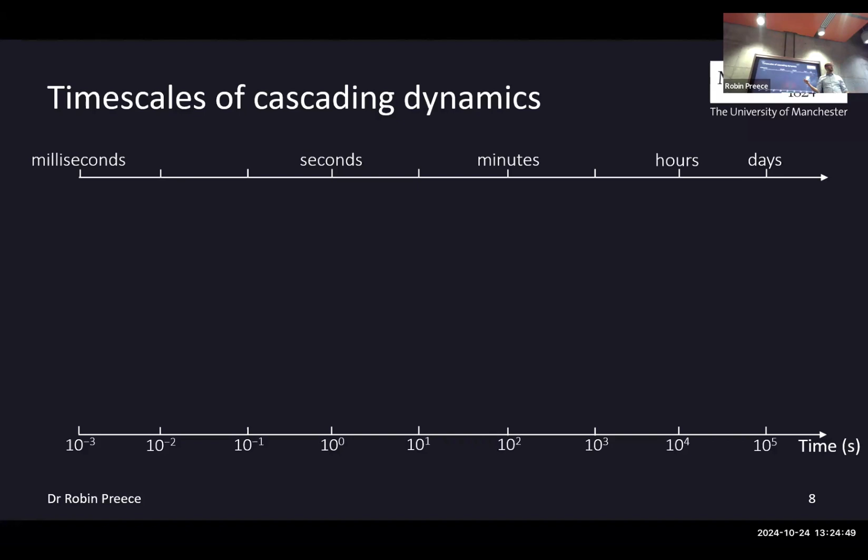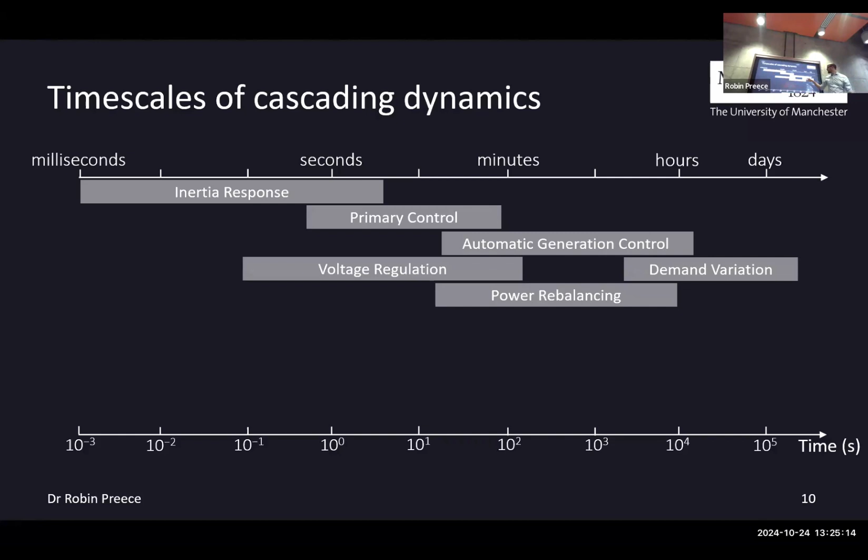So we can start with the kind of traditional frequency stuff, which can span from essentially instantaneous response after a disturbance in the inertia range through primary control into secondary AGC control. So how we reschedule our generators and bring our frequency back. We've then got voltage regulation problems. So stuff with voltage, how that's affected by demand, how power rebalancing within our system is going to affect that stuff.

And then we've also got down here, what are the protective devices that are operating on these different ranges as well? So if there's a faulty element, how long does it take to remove that from the system? If we've got under frequency load shedding or under voltage load shedding, how long does that take to operate? We've got things like branch overload protection. So if a line gets overloaded, at some point we need to trip it out because it's going to melt.

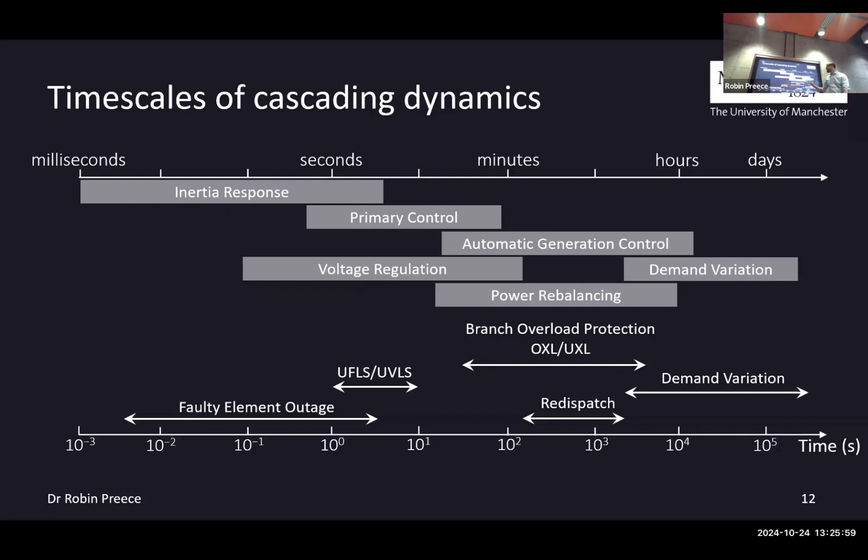We've got overexcitation, underexcitation limits on our generators. We can redispatch those generators. And again, we can choose to redispatch our demand if we have control over it as well. So there's all of these potential options. And I'll tell you now, doing all of it is too much. So we couldn't do all of it. We had to make some choices, especially as a first pass. And so I'll come back to which ones we chose in a bit.

So for us, we were looking at, okay, the other option is static models. And here when I say static, I'm going to start with just an assessment of DC power flow. So these are the super quick ways of assessing the power flow in your system. So a DC model. So great, reliably converge. I say converge, it's not really converging, is it? It's just like a direct solution.

Very computationally fast. You can easily capture things like line overloads. So it's great. DC power flow will tell you the line loading. Obviously it's inaccurate to some extent, but gives you a good estimation of line overloading. I can redispatch generators. I can deal with those kinds of things very easily. And it gives acceptable consistency with historical data.

So there's been a lot of work looking at using DC models for cascading failures and looking at how does that match up with historical work. And it's pretty good. So maybe we don't need to worry about adding in all these dynamics. Some of the problems, obviously this neglects voltage deviations, reactive power flows, things associated with that. You can then fix that using AC power flow. But obviously the big one for me, it neglected all the dynamics associated with it.

And I guess the reason I'm concerned with dynamics, I mentioned there was the under frequency event in the UK, 2019. Now, in that event, parts of the country tripped off. So some parts of the country experienced under frequency load shedding. Other parts of the country did not. So what that means is that in some parts of the country, the frequency dropped too low. And in other parts of the country, the frequency never went low enough to trigger that.

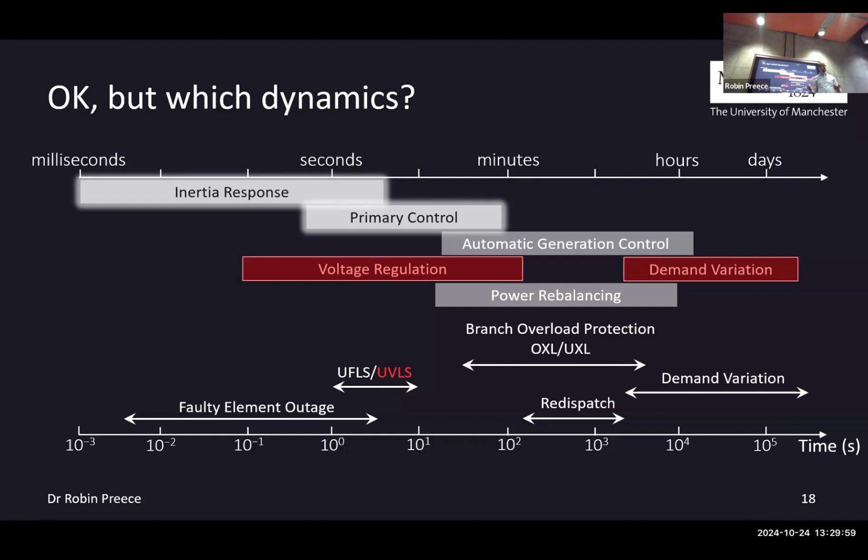So we're going to look at the inertial response, the primary control. We're not too worried about the AGC because it's essentially too slow for us to worry about during these fast cascading events. So we're going to model under frequency load shedding, but we're not going to model any of the under voltage load shedding. And so within our model, we essentially voltage lock it, and we just make it incredibly robust from a voltage perspective, so that we can see all the frequency changes there.

In terms of test systems, we used the Texas A&M ones. You might be aware of these, but they build synthetic models. So these aren't the actual models of Illinois or Texas. They are equivalent models that could exist given the load distribution and generation availability, etc. What's really nice about these is that they're publicly available, and you can get them as dynamic models. So we need to build a dynamic simulator that can then take these and work with them.

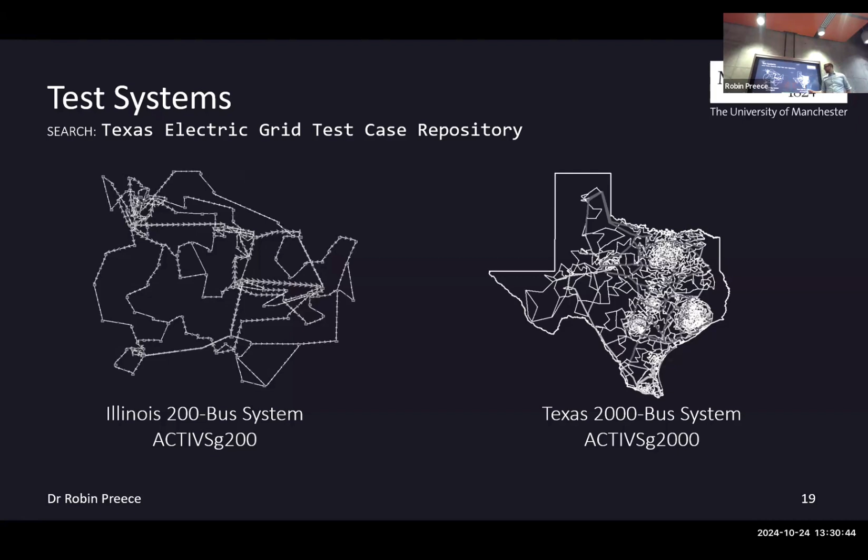And once you get to 2,000 buses as a dynamic system, this is pretty large for dynamic studies. This one takes a long time to run, particularly when we stack in all of these various devices. So our cascading failure simulator, we need an engine for it. We need something that's actually going to churn through and do all these simulations.

And we're using DigSilent. DigSilent is a power system dynamic simulation software package. We use that because we've got a lot of experience using it in Manchester, and we have that experience because National Grid use it in the UK. They use it as their default power system simulator. So we've built up expertise and skills using it to make sure that we can then translate our work into industry and have some industrial impact coming out of it.

We need to model synchronous generators. As I say, we're ignoring the voltage stuff, so we're just modeling these as classical second order models. That means it's got a swing equation. It's got a couple of dynamic states associated with the mechanical system. But from the voltage perspective, it's just a constant voltage output. So we've got no voltage control associated with those, but we do have the primary control. And apparently we've got secondary control.

For demand, demand doesn't matter too much. We are actually modeling it with a ZIP model, but like I said, we're not worried about the voltages in the system, so the actual voltage dependence doesn't really matter. This could just be a constant PQ load; it would be the same result. We have some frequency dependence on the demand, but it's quite small. It doesn't have a big effect on the result.

And then we're going to compare this to a static. We're going to use the DC OPF. So the difference here is that that runs a power flow. And then if it sees that a line is overloaded, it collects up all the overloaded lines, just trips them all off. It will then redispatch the generators according to the new topology.

It allows some variation in some of those generation and loads. It allows them to move a little bit, essentially to emulate the behavior that you would get from some kind of frequency response. And it includes over frequency generation tripping. So essentially, if I have an island where there's too much generation, it will then start disconnecting the generators starting from the smallest one in order to try and find a kind of static operating point that converges.

So we've got some kind of emulation of some of those dynamic processes within this, but it's obviously not running the actual dynamics itself. So those are our two different models. And then to trigger any kind of outage, we're using n-2 contingencies. So these systems are safe for n-1. They're fine, secure for an n-1 situation.

So we need to hit them with an n-2, something more significant in order to cause a problem large enough to start a cascade. And most n-2s don't. Most n-2s are fine. It's only some of them that actually cause problems. That's actually a really interesting question: how do you find out which of the initial contingencies you need to cause a cascade in your system? It's not a trivial question to know where the combinations of multiple outages will be that lead to a big cascade in the system. So we need to figure that out as well.

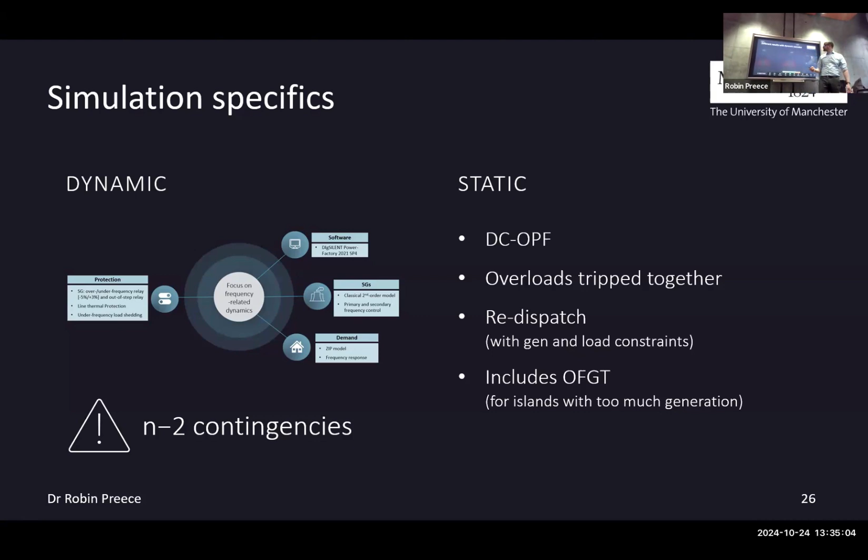So main result, you get different results when you use dynamic cascades. Okay, so we actually see a difference. So here we're going to plot essentially a cumulative probability plot of unserved demand versus the actual amount. So if we see the static one, what this means is that there is a high probability of losing a low amount, and then as you go down the curve, we then see very low probabilities of essentially total blackout in the system.

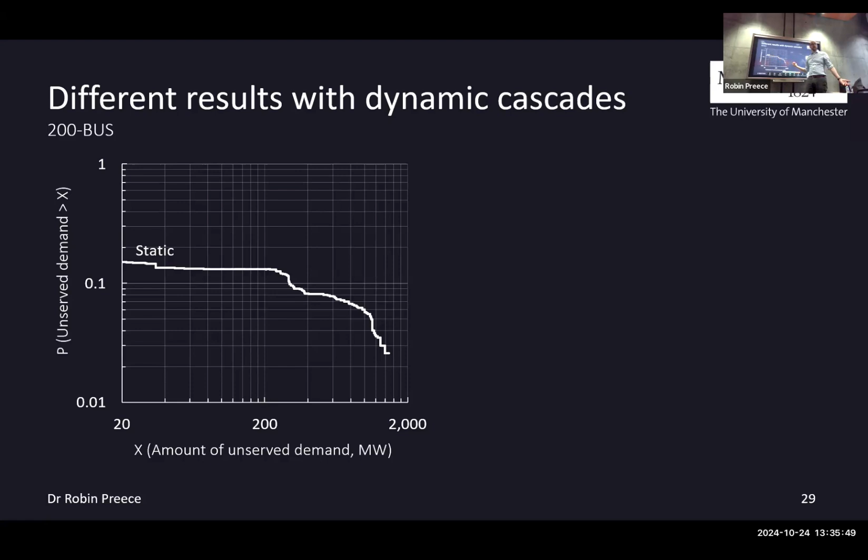So this is the classic way that we plot the results for cascading failures, and this kind of curve is what you would expect. Okay, so this is what you get when you look at this. If we do a dynamic simulation with the same system, but with our extra dynamics in it, we get a slightly different result.

So we have a higher probability of small trips. So we've got a higher probability of seeing small blackouts, like local blackouts, little areas where we've just lost a tiny little bit due to some under frequency load shedding. But we've got a lower probability of larger blackouts. So you can kind of summarize it as these small trips help save the whole system. And so we're seeing this difference in behavior, and this difference maps through into other aspects.

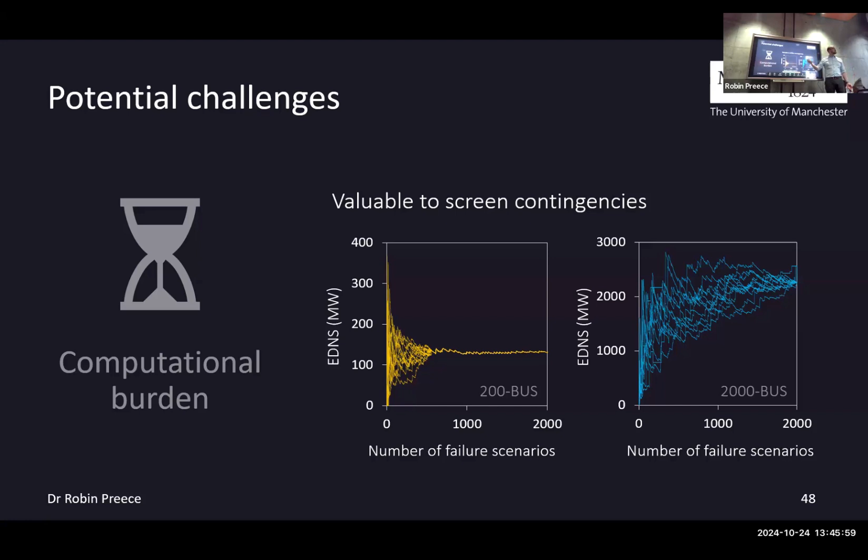So by the time we've run 1,000 simulations of n-2s on the 2,000 bus network, I have confidence that my expectation is somewhere between about 1,200 and 2,400. So it's nowhere near converged to a final answer. And the CVaR values are going to be even worse. So the amount we need to run in order to get this to a reasonable solution, that's a real challenge.

Things we can do to help with that include increasing step size. At the moment, you take a dynamic simulator, and by default, you're probably running at about 10 milliseconds. That's a typical thing that we do for most power system dynamics.

You can obviously push this up. You can't push it too far because at some point you're pushing it to a stage where it's not fast enough to see the devices that you're tripping. So if you've got a fast rate of change in frequency, you can't go much faster than about 0.3 seconds, because you might have crossed over a couple of thresholds for under frequency load shedding within 0.3 seconds. So you need enough resolution in your time step to be able to take an action before the next time

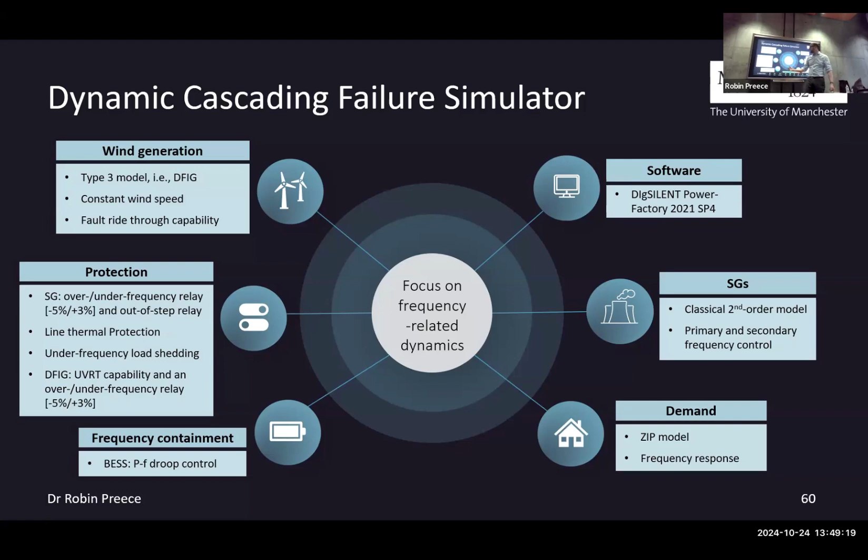We also need to add a little bit more protection. So we need to put protection on for the wind generation. So we've got under voltage ride-through, and then we also have them tripping off for over and under frequency as well. And then we have to add in frequency containment as well. So our system now is potentially going lower and lower inertia. And so we need to add fast frequency containment services to make sure that for a normal secured event, like an N-1, that frequency is not going to lead to problems. It can't, because otherwise all we're doing is making our system weaker and then concluding that our system is weaker. And that's not good. So we need to build our model appropriately.

We also need to do a little bit more work on the setup because we have the same challenge, which is we don't want to just add a load of wind farms somewhere in the network, lead to that part of the network having a load of extra generation, and then that causing overloads on the lines and us tripping the lines because they're overloaded because we never did any network reinforcement that we should have done. So we need to add some of those steps in as well.

So we take our inputs, we've got our data, we've got our wind, we've got our FFR. FFR is fast frequency response. I'm going to assume that that is just evenly distributed across the whole network. You can do a study where you move it around and see what effect it has. It has a small effect, but for this, it's just evenly spread. We then make sure our system is N-1 secure. So we run an N-1 security constrained OPF to make sure that our system can cope with any N-1 on the system without being overloaded.

If it fails that, we then do some basic transmission expansion planning. We are not transmission expansion planners, so we basically just look at which lines get overloaded. We then assess them based on how long they are, and we upgrade whichever one would be the cheapest one to upgrade, so typically the shortest. So we come up with the cheapest possible solution to get rid of our overload problem and to make our system N-1 secure again. It is not a perfect optimized way to do it, but it is a broadly representative way that leaves us with a system which is N-1 secure, which is what we want.

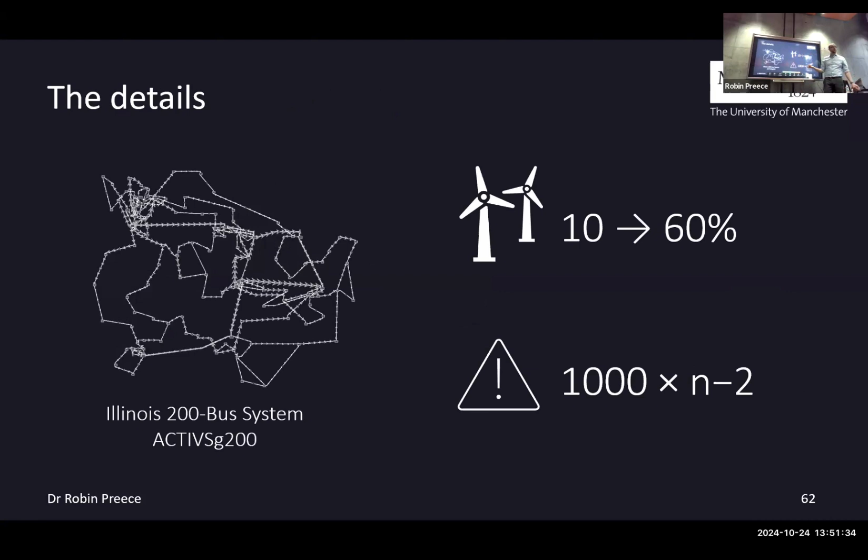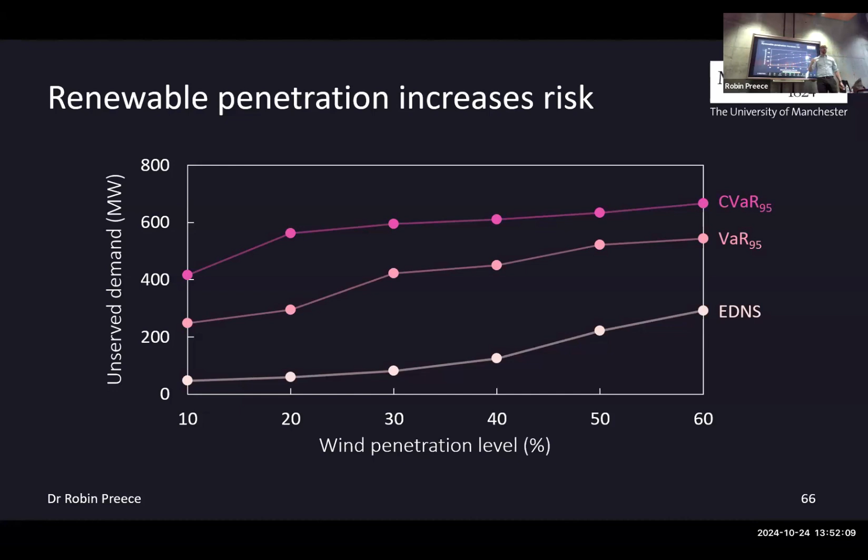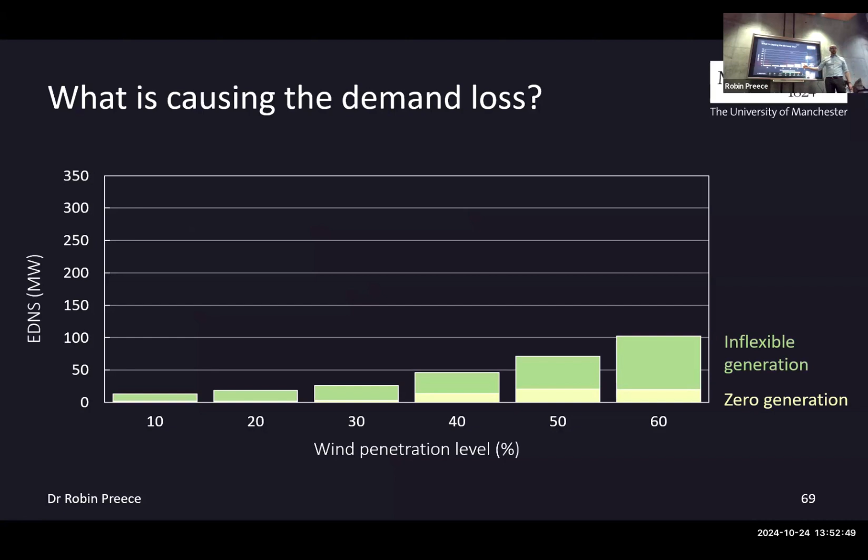We then have islands with inflexible generation. So they have some generation in them, but they can't move enough. They have some variability, but not enough. They're going to hit their limits, min or max, and therefore it's going to become an infeasible solution and they're going to get tripped. And then the biggest chunk is the under frequency load shedding. So what we see mostly causing the demand loss for our cascades is just under frequency load shedding.

So as I increase the amount of wind, I'm displacing my synchronous generators. I'm now seeing faster rate of change of frequency. That's causing more local under frequency variations, and that's causing under frequency load shedding. So that's the story that this result gives us. So we're pretty confident that the problem now is something to do with inertia, and that's what's causing the problem.

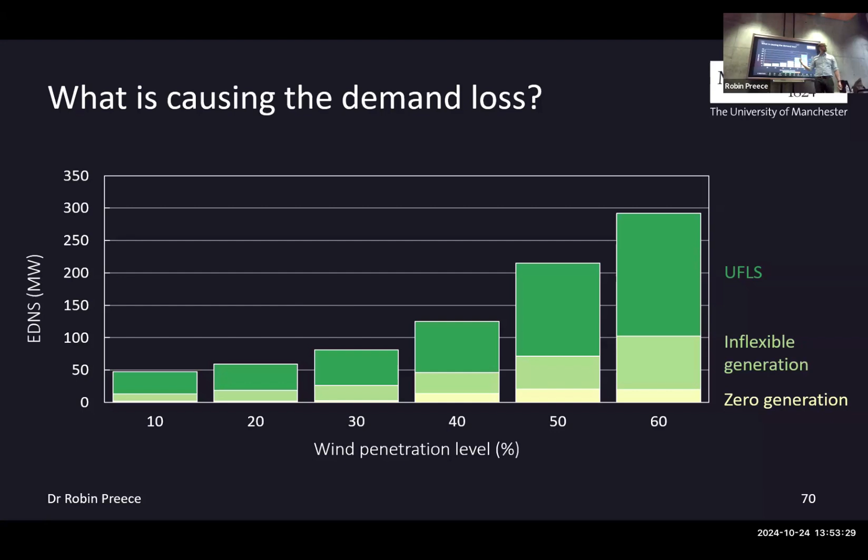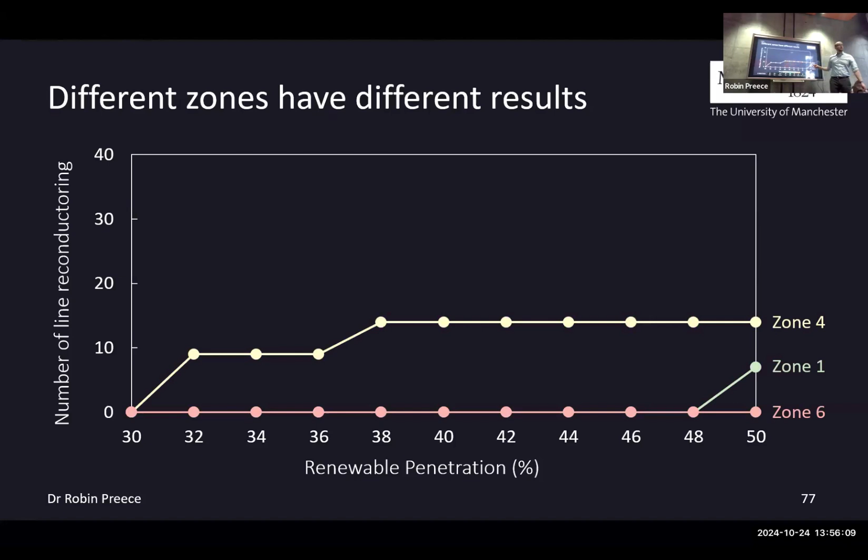So this is just showing how many extra lines do I need to build. And you see here, zone 4, this was the one I think that had the highest line loading. You can see I have to build a lot of extra lines to be able to get the power around that part of the network. And so obviously these zones have very different properties. So then it's like, okay, we probably expect some difference in the results. And we get quite a lot of difference in the results.

And what you see is that if you put the renewables somewhere like zone 1, zone 6, you end up down here at about 600 megawatts as your expected loss for any given blackout. But if you look at zone 5 and you put all your renewables in there, okay, well, that's up at the kind of 1100. It's almost double the risk, depending on where you put the renewables.

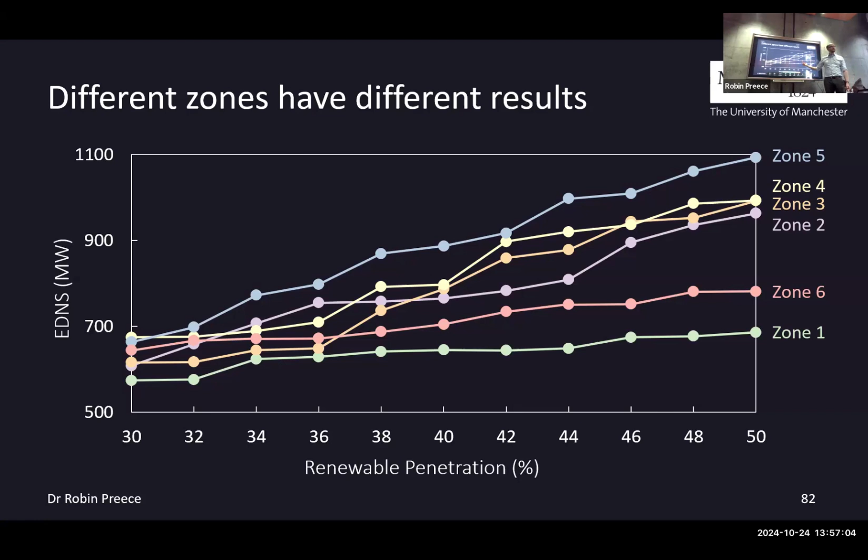And we were thinking back and we were like, okay, well, we saw loads and loads of under frequency load shedding. Under frequency load shedding was the biggest cause of all of our trips in the system. And that's going to depend on inertia. So let's create a case where we adjust the inertia of zone 1. So we're going to artificially lower it to exactly the same value as we have for zone 6. So we've made this new comparison case where we've adjusted it.

So this is about as far as we've got. I don't have a nice summary that explains what it is all caused by. We're still investigating it. But the point is, you get some clues, you think that it's under frequency related and therefore it's an inertia problem. So you adjust the inertia to try and see the impact that has. And then you do that, and then you still find out that it's all affected by loads of other things as well.

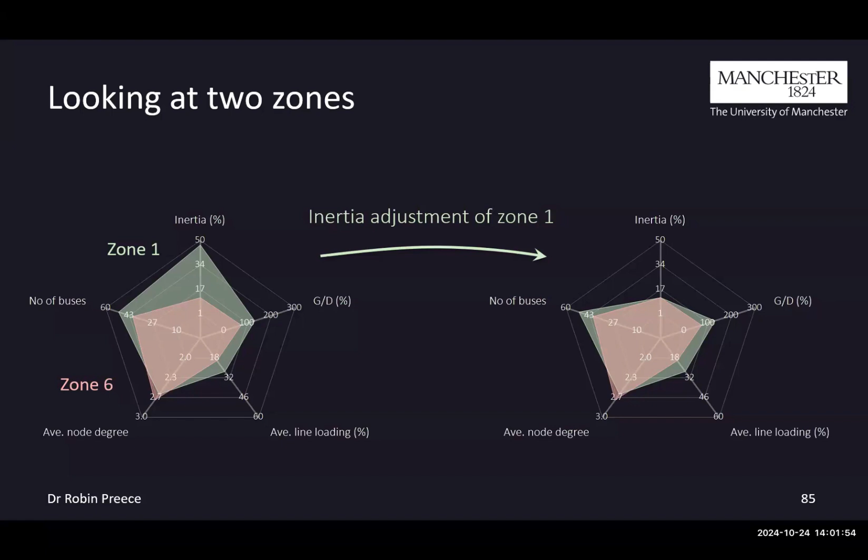Yeah, so my point is, if you are doing this high renewable penetration, then your inertia will be reduced to that amount anyway, because your synchronous generator will not be dispatched. So eventually you're ending up at, say, 50% penetration. Your inertia was low whatsoever, so you won't see the difference. But this is offline, we can talk about it later on. I just want to know your setup, so I don't want to drag this too long.

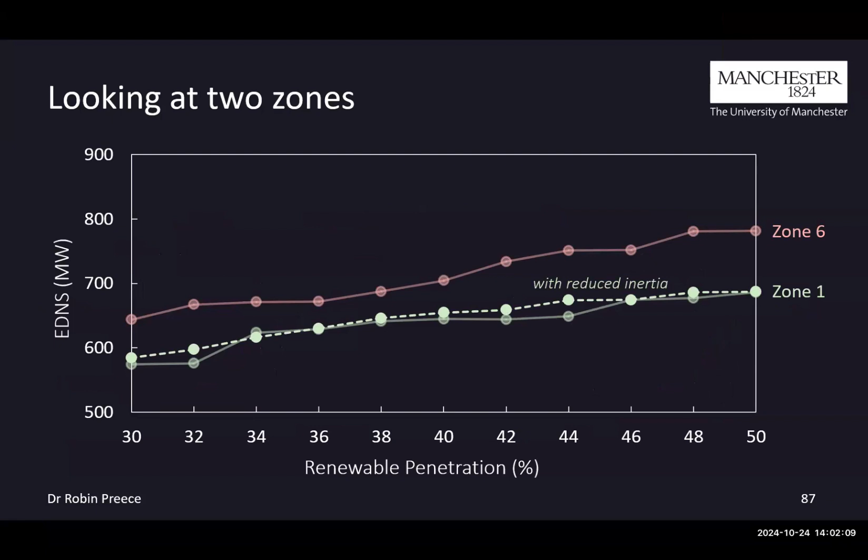Sorry about that. No, it's an interesting point. I know what you're saying. Sorry, I'm pointing at the screen that you can't see. When we're down at the low end, we've still got some of that synchronous generation being dispatched though. So I get what you're saying at the higher levels, but I'm not sure we're high enough in terms of the dispatch to have essentially dispatched out that generation.

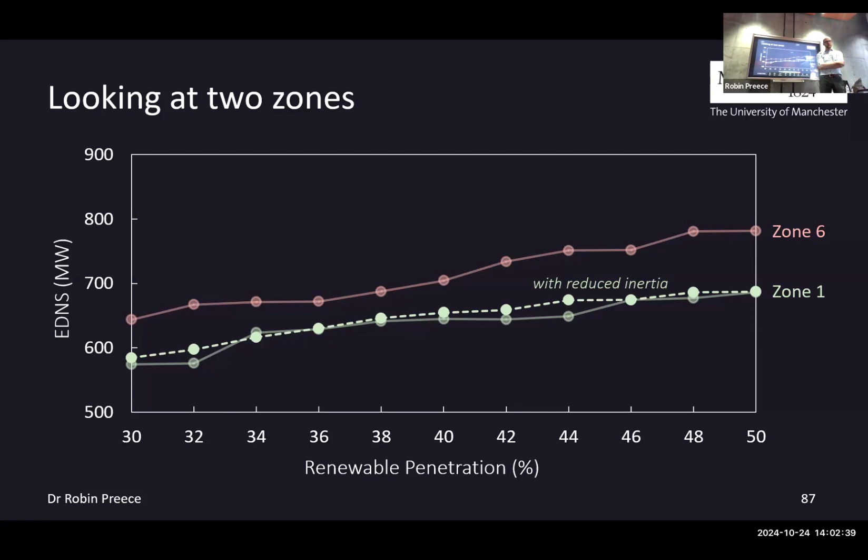Yep. Cool. Anyway, I'll get to the summary. I guess the main thing, I'm going to argue that dynamics in cascading failures is an important thing to include, particularly the non-global frequency behavior that we see. So there's some really interesting methods that exist about extending AC power flow methods to have frequency represented as a state, within an augmented power flow solution including frequency states.

The challenge is that I'm not sure how you do that and maintain a regional representation of frequency, and I think you do need some regional representation of frequency because that's causing these differences that we see. And I would argue it's increasingly important as RES increases, but as the presentation has shown, there are plenty of unanswered questions that we still need to focus on quite a lot.

If you're interested in any of this, you should search for these names. Yitian is my RA.

who's done most of this work. So if you search for her name, you'll find the papers on this.